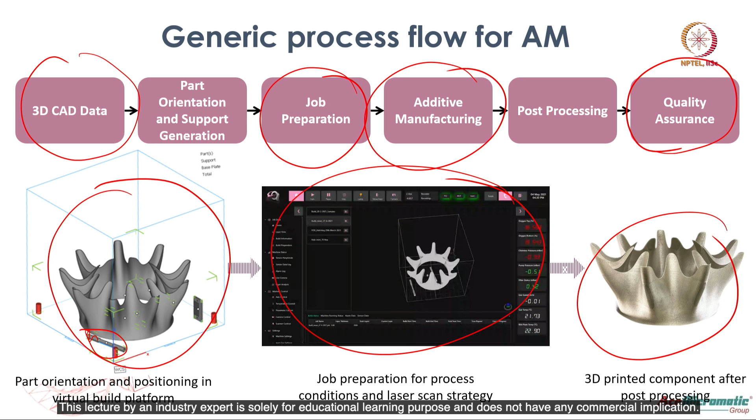In certain cases we also involve reverse engineering, where we create the 3D file itself from an existing part, where you scan the part and get the 3D model ready itself. And in certain other cases we may also have some machining or a few other aspects involved from a post-processing perspective.

Now, why is there a need for additive manufacturing? We'll take a step back and see what is the actual need.

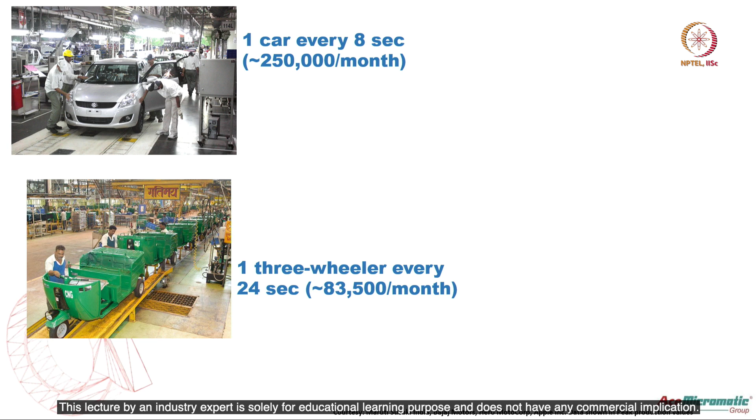So here are some statistics which show that in India, a three-wheeler is being produced every 24 seconds. This is a line of maybe a Bajaj Auto or another three-wheeler, just depicting this specific statistic, where every 24 seconds there's a three-wheeler coming out, made on a flow line assembly. Similarly, a four-wheeler, a car, is getting produced every 8 seconds. Then we have a motorcycle being produced every 2.2 seconds. And finally you have someone like Apple making 10 iPhones every second.

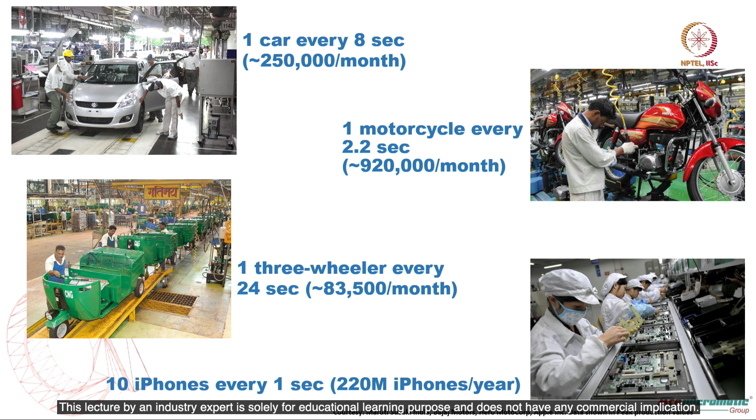So this is just giving you a sheer size in terms of the volume of a generic industry where we stand today. These numbers may be up or down, but the point we are trying to drive here is we live in a very, very high volume consuming base from an industry perspective. Now, what is happening in terms of this volume? What is changing? This has been there forever. What is new here? Now, the buyers are getting more demanding.

What used to be a long gestation period for product development, in many cases earlier, products would get developed on a cycle of about 5 to 8 years, be it a car or a motorcycle. They wouldn't undergo revision in design, or modification to the existing product would not happen for many years.

But now people are demanding it much faster. They want it now, they want things to be seen now. So the demand is increasing. The changing scenario is everyone wants something new, something next. So manufacturers have to step up to this, and the varieties are increasing.

Earlier, one specific variety would get manufactured in much higher volumes, but now that is shrinking while varieties are increasing. So a mobile phone manufacturer has to make something new every year. A car manufacturer has to modify his car every second year maybe. Similarly, a motorcycle manufacturer has to launch something every year or every alternate year.

This is the challenge being seen in the industry, for which one of the techniques or technologies strongly supporting this is additive manufacturing, where you're able to develop products much faster. Your prototyping is much faster, rapid prototyping becomes much easier, and you're able to launch it to the market much sooner than what it used to be earlier. Similarly, every aspect of it, not only prototyping but batch production and eventually even mass production, is very well supported by 3D printing. It's not the only technology, but one of the technologies supporting this growing demand from the industry.

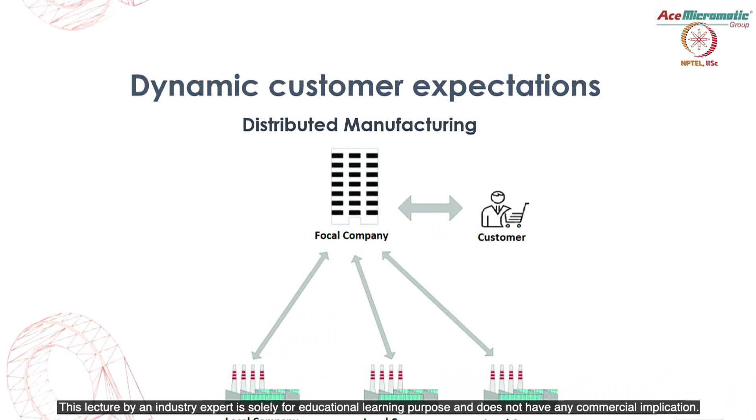Now, to meet this, where is this going to lead to? Some of the manufacturers are working on distributed manufacturing. This is one of the future trends, where you have one focal company with multiple local companies attached to it, so the manufacturer can dynamically distribute the load based on current conditions.

Earlier, lead times used to be much longer for a specific part to be produced and supplied. But here, the newer trend is where you're able to meet these demands much faster by distributing the whole manufacturing cycle chain, with local companies based on dynamic availability or equipment availability. Manufacturers, which are focal companies, are able to source it from individual local companies - A, B or C - based on the current condition of available load on them.

So this is what is going to grow going ahead - this methodology called distributed manufacturing, which is catering to the growing demand of the customer. Here you have material that can be allocated in real time, raw materials, and the production can be planned and then sourced on a dynamic basis.

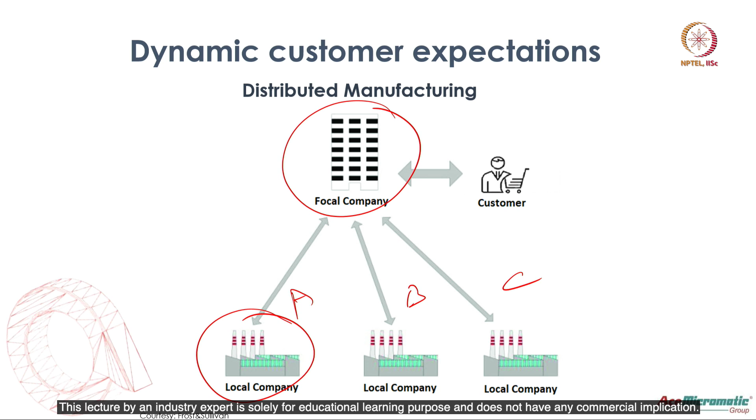Another popular technology strongly coming up is mass customization, wherein the customer's demand is becoming more and more customized. Manufacturers are offering customized solutions to every end user - automotive is one of the last sectors to adopt this, but in every other sector you'll see it, be it sports equipment or engineering components - where varieties are increasing and volumes are shrinking. So to meet this, you have mass customization.

One of the industries which has adopted this well is the medical sector, wherein hearing aids are completely 3D printed today, which are customized - meaning in a given volume, you have one part made for every individual end customer, but they're all mass produced. So customized parts being mass produced is what is called mass customization.

So you have product design and build to order at a factory happening on a continuous basis, but they are all built to order - that's the customization part. But since the volumes are high, this is a technology helping that. Additive manufacturing is supporting mass customization very strongly, demonstrating one of the future trends: mass customization.

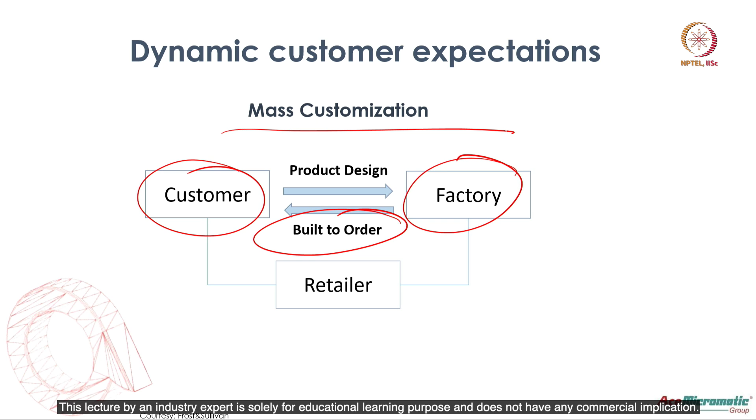A demonstration is eyewear today being mass produced by some manufacturers where volumes are shrinking to as small as 1, where earlier it used to be a minimum order quantity of X numbers, but today it's shrinking all the way to 1. Because the user is becoming more demanding and choosy, eyewear manufacturers let people try it on in a digital frame where they can see how they look and decide what design suits them, and that gets 3D printed and offered to the end customer. So more specific customized parts is what we are seeing.

Today we all understand when we say manufacturing, one of the biggest industries is automobile. One car manufacturer has already started doing this for some of the softer aspects. We all know this car, the Mini Cooper.

Mini has launched 3D printed personalized upgrades where you can choose some of the cosmetic parts, the inner touch and feel aspects of it are being 3D printed. So the day is not too far when we will be able to choose what aspect, be it a steering wheel, maybe the seats, maybe something else, that could be customized.

One technology that is supporting this very well is the metal 3D printing route. So when it comes to metal, again very similar, you get to choose what aspect of it can be 3D printed comfortably. Even in India, we have eyewear manufacturers exploring this as a possibility where higher volumes can be produced in much shorter time, but they're all customized for the end user. So that was about one of the other new trends from a future perspective.

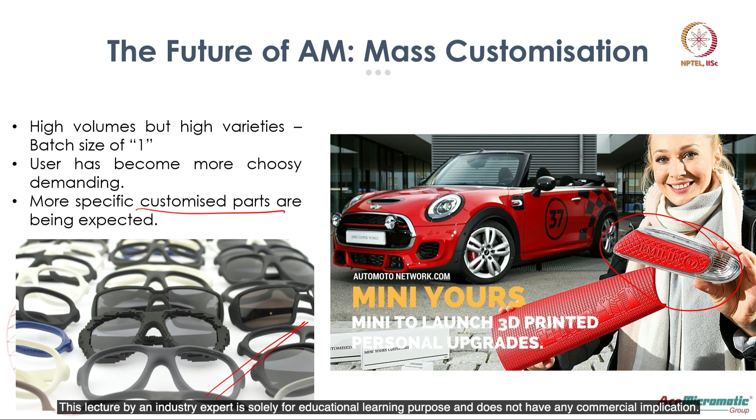Now, what is happening from some of the other recent advancements? We have been hearing a lot about artificial intelligence being used in 3D printing, or in generic, in all industries. So one of the areas that additive is also adopting is artificial intelligence. So where is it relevant? We have AI being used for creating better 3D printable models.

We have a good prediction model coming up to tell what design would be more suitable for printing, and how AI is supporting in generating hundreds of designs. In a very short time, there are programs able to churn out different design combinations, and finally they can be put through some design simulation to say what would be the most suitable one.

Something similar is happening to improve the printing process. Every manufacturing process has failures attached to it, so some of the earlier defects can be fed in. There are manufacturers and software providers working on developing advanced tools where all the past experiential data in terms of the process is fed in to ensure we get first time right in the printing process.

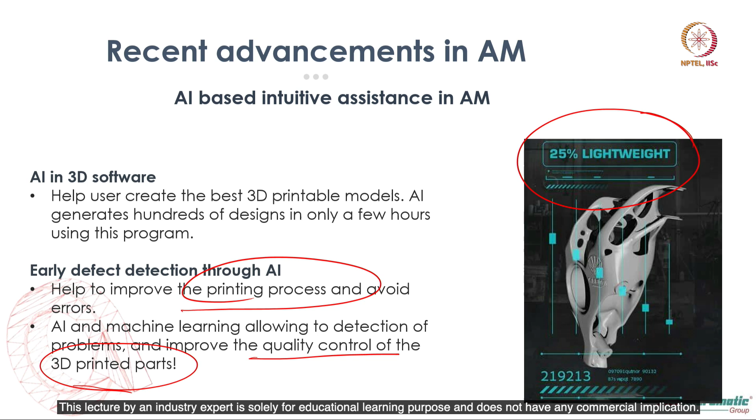Currently, bulk of the inspection or quality control methods are a post-printing aspect, which means we print the part, manufacture it, and then go back to see what has happened and how we could have corrected it. So instead of doing it as a post-printing process, an inline process is being explored for real time monitoring, getting the quality much better on the fly. This is another interesting trend that will help immensely in the manufacturing process.

Now we will look at some case studies in 3D printing. We'll look at different case studies which will give you a diversified perspective on how these technologies support medical, aerospace, automotive, tooling and general engineering sectors.

In medical, surgical assist fixtures and tools are being produced using 3D printing. Today doctors can recreate the entire environment of how the patient's inside looks. The data can be captured and recreated using polymer printing, allowing them to see the effect beforehand so surprises during actual surgery can be avoided. This minimizes surgery time so a patient isn't cut open longer than necessary. A lot of healthcare equipment parts and medical implants, both customized and generic, are being 3D printed.

In aerospace, lightweight structures are produced in minimum time with minimum machining. There's a term called buy-to-fly ratio, meaning in conventional processes a 10 kilogram input part could be scooped out until it's as low as 500 grams when ready to fly, wasting about 9.5 kilograms of material. This is minimized with 3D printing, where just enough material is used to produce the part, reducing scrap and making it more suitable for the application.

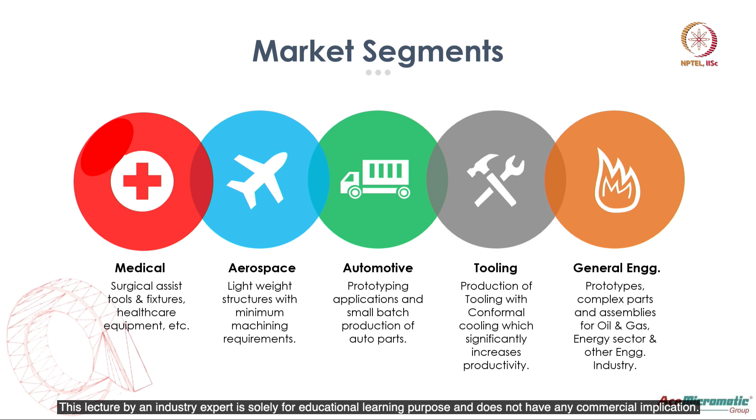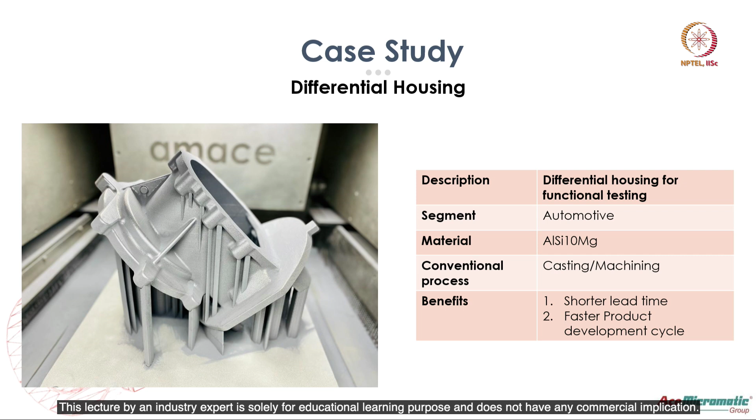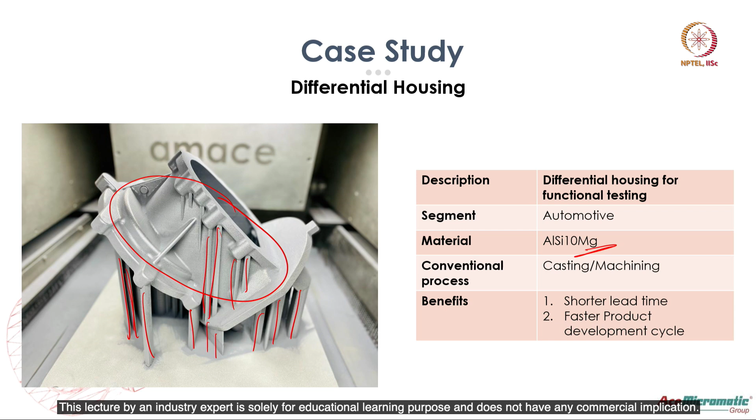We'll quickly look at some interesting case studies. From an automotive perspective, here's a component for one of the Indian automotive manufacturers, who had to launch this product in a very short time. This is the actual part, and these are the supports as explained earlier, which physically support the part and help reduce generated heat. These can be removed manually or with a machine. This automotive component was printed in aluminum alloy, and the whole process took less than 10 days, which would otherwise have taken many weeks using conventional processes.

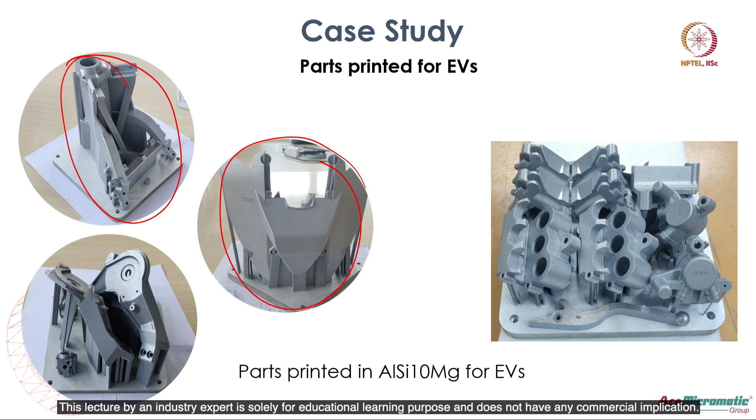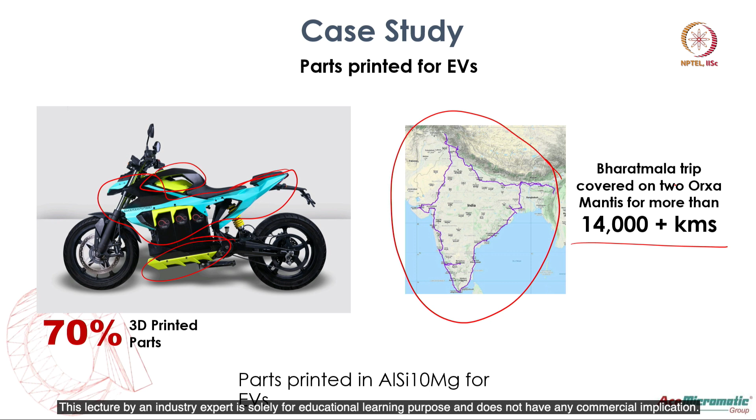Another interesting case is for an electric vehicle, manufactured for a startup from India. Load bearing components like structural parts with heavy weight, as well as peripheral parts more for aesthetic purposes, were 3D printed in aluminum for this automobile company called Orxa Energies. Everything shown in green was 3D printed. More than 70% of the bike's parts were 3D printed by us in a span of less than 12 days, and we printed about 3 motorcycles. Two of them went around the country, setting a Guinness record for an electric vehicle riding about 14,000 kilometers on the Bharatmala tour. This was done on our machine, by our company.

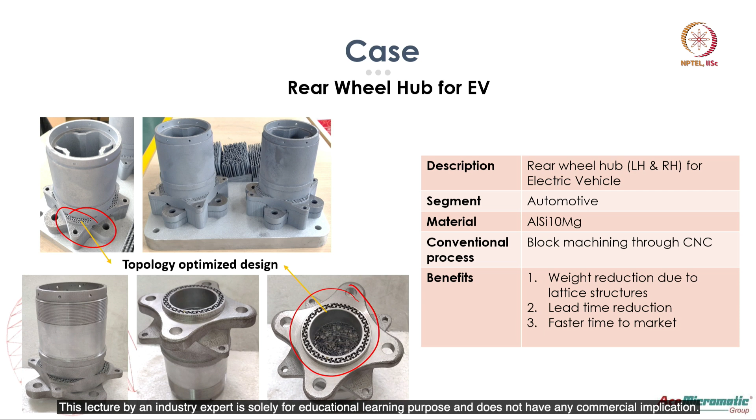More interesting cases where not only was it 3D printed but also design for additive manufacturing was used. Here you can see topology optimization or lightweighting was adopted, giving that design flexibility. You can see cases where weight was reduced, though to a smaller extent, but the advantage 3D printing gives you is you can try out different varieties, multiple options, without having to invest heavily in the manufacturing process. This was conventionally done through block machining, whereas with 3D printing it was done much faster, better, and lighter.

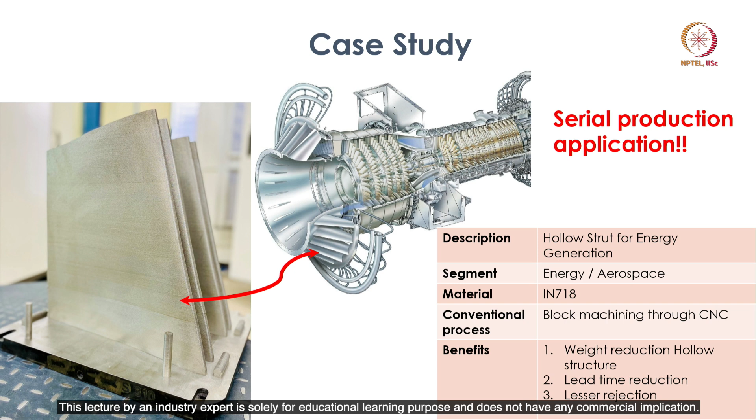This is an oil and gas, energy generation case study involving hollow struts for a power generation example. The conventional process was taking a solid block or forged component, with a lot of machining involved, but the challenge was getting the hollowness inside. Here it's actually a hollow structure with cooling lines going through it, a production part for an engine converted for power generation. Each of these struts is used for the application.

This is being done by one of the manufacturers on a continuous basis, an annual order. It's a serial production application using a material called Inconel 718, a nickel based alloy that can take high energy and high temperatures. In this case the temperature goes all the way up to about 1200 degrees.

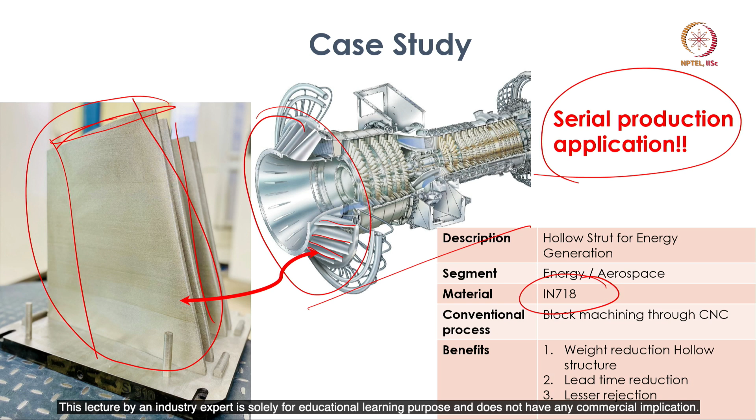Manufacturing this is a big challenge in a conventional process, but with 3D printing this was done with sufficient ease, and a lot of simulation went into doing this. The advantage is in manufacturing time and getting the challenges in terms of the hollowness reduced. That was a big advantage seen in this whole manufacturing process. Multiple of these are used in one assembly, and multiple assemblies are used in the whole manufacturing process. So in energy and aerospace applications, 3D printing is being used extensively.

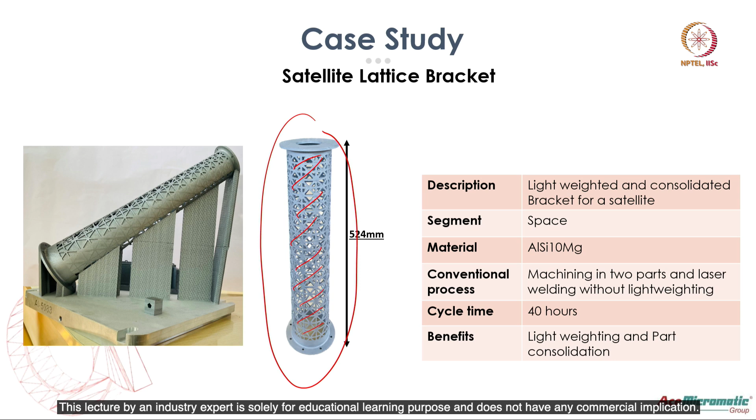This is a lattice structure that was done for the space organization in India, ISRO. Here you can see the part is much larger in size, conventionally very challenging to make because of the lightweighting required. You can see the entire lattice structure done on the part. Manufacturing this conventionally would be very challenging, but using 3D printing gives the advantage of making it lightweight — any design, any concept can be manufactured with sufficient ease.

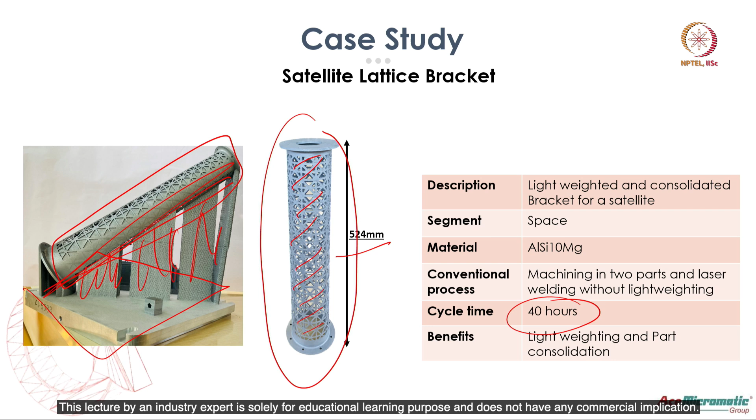This entire support was used to place the part diagonally and produce it in this shape. In this case the machine build volume is much smaller, but because of the diagonal shape we were able to achieve a large size of 524 millimeters. The printing time was less than 2 days, which otherwise would have taken much longer through the conventional manufacturing route. So this is a lightweighted space satellite bracket that was manufactured.

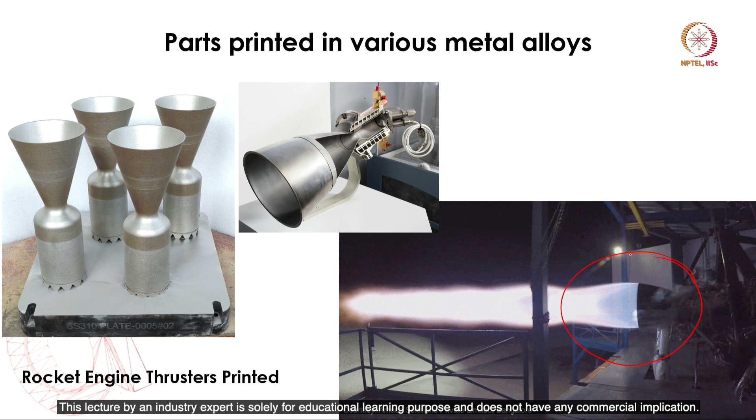These are different thruster components, manufactured in different sizes and shapes. These are basically the last stage of a rocket engine where the gases come out — you can see the simulation or animation shown here. They invariably go to very high temperatures. These have been manufactured from small size micro thrusters to normal size ones for rocket engines, used from a smaller size perspective normally for satellite correction to meet orientation requirements. These are put to use in space after deployment. Many such printed parts have been put into space from a space application perspective.

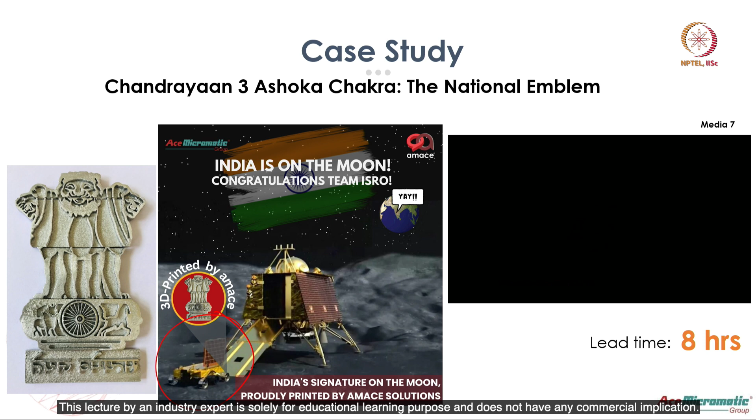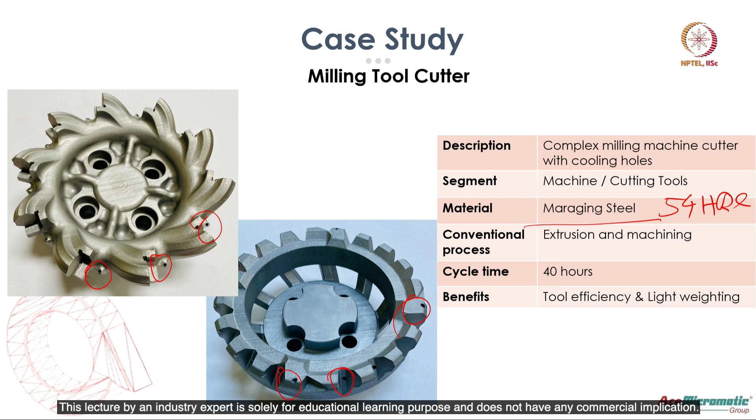This is printed in a material called maraging steel. After heat treatment it reaches about 54 HRC, giving very strong hardness, and is done in a very short time. The advantage is the design itself, which is very challenging to do otherwise, and gives much better efficiency during the cutting process. This is another interesting engineering application.

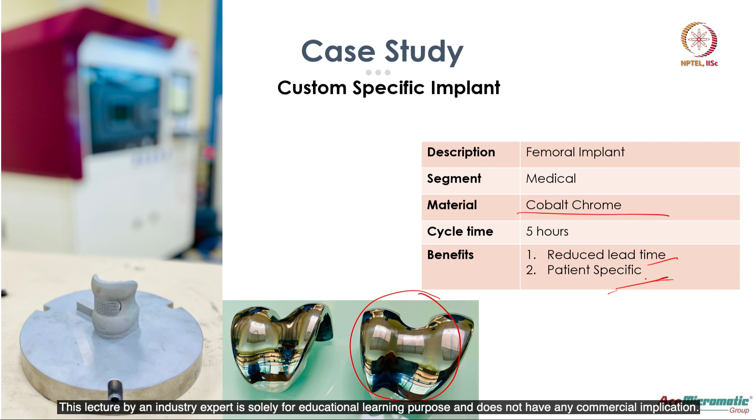One is a generic implant of standard size, the second is a custom implant taken based on a specific person's size and shape, designed and manufactured to suit the specific patient. The advantage here is reducing lead time and enabling patient-specific customization. This is printed and then finished for medical application.

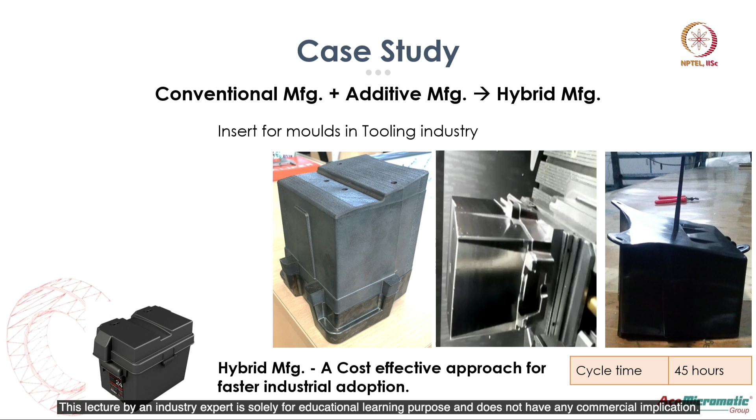Coming to die manufacturing, one advantage 3D printing offers is hybrid printing, where we can take an existing plate and print on top of it with cooling channels. This technology lets us create curvilinear or circular cooling channels, which gives much better cooling efficiency. This is largely used in plastic injection molding.

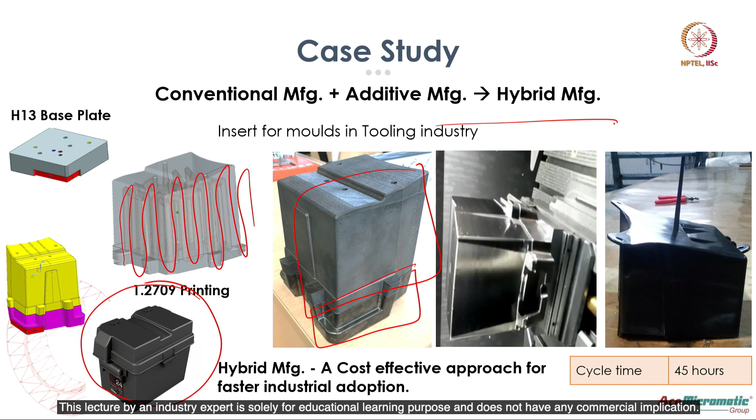In this case, this is a battery case for an automotive application. The bottom part is a conventionally made plate in H13, and the top part is printed using maraging steel. This is what we call hybrid printing, where after printing you can machine the part and get the final finish as required.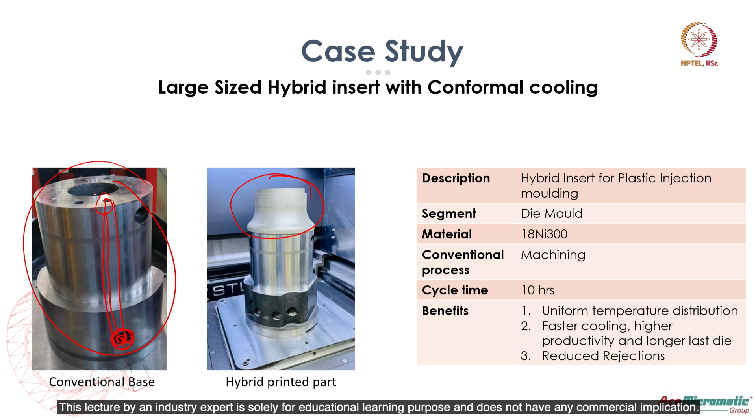Another interesting hybrid printed part is taken as a conventional part and then printed on top - this is the only part that's printed. This hole is made conventionally, and the vertical hole which joins it is made vertically, so the cooling channel water goes straight up, but on top you have a circular cooling channel shown in this specific area.

This is also done in maraging steel. The advantage is the heat affected zone in this area gives uniform cooling, so you're able to improve productivity by about 30 to 40% when using conformal cooling like this.

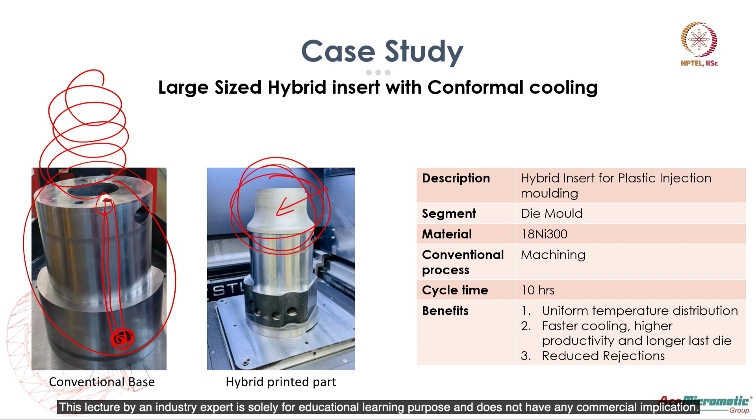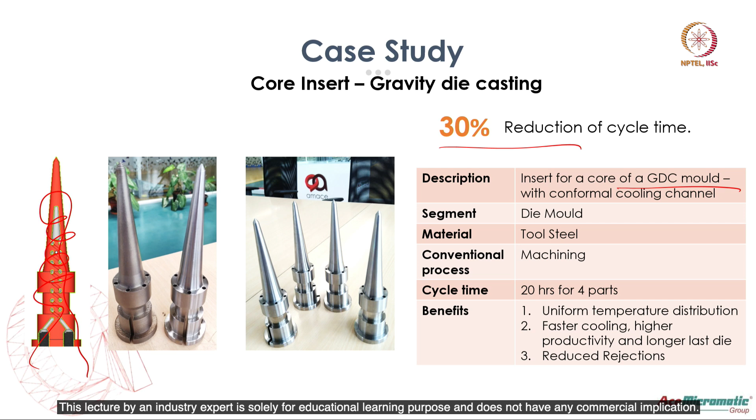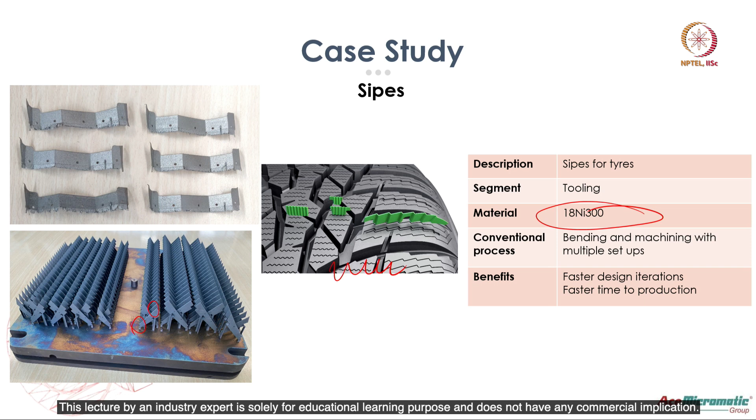This is again done in maraging steel or 18Ni300. The advantage is bringing down manufacturing time, and there's no minimum order quantity, so very low volumes can be produced without any investment toward manufacturability. This is from mold industry to automotive application.

So those were the topics we've seen in terms of applications and case studies. In the next lecture we'll look at other aspects of this topic. Thank you.